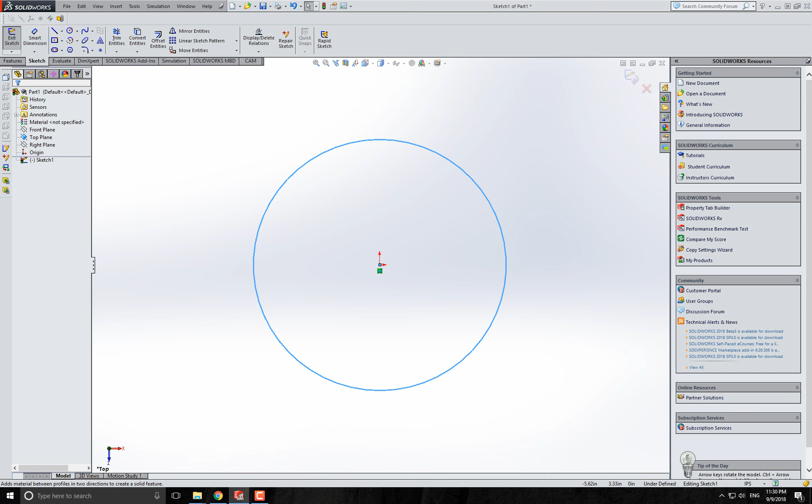First, we need to create a profile and start with a sketch on the top plane. We're going to create a circle for the faceplate, with a diameter of 5 inches, so the radius will be 2.5. We sketch this, and it's good. Then we extrude 2.5 inches thickness, and now we have this raw material of the clock plate.

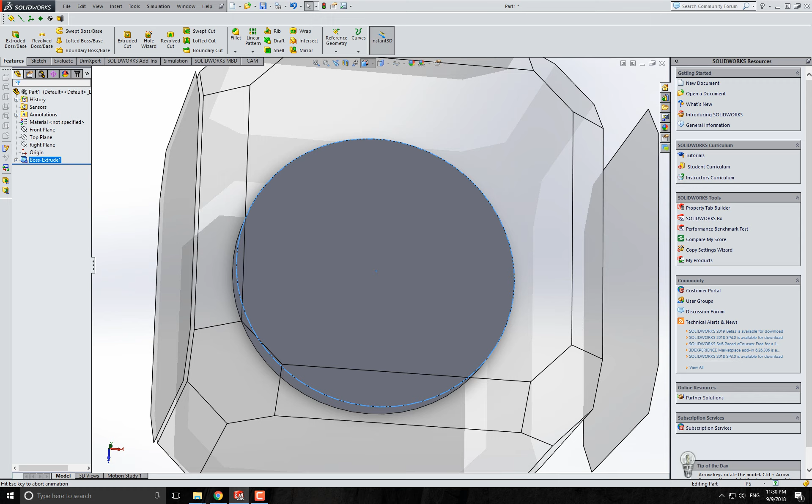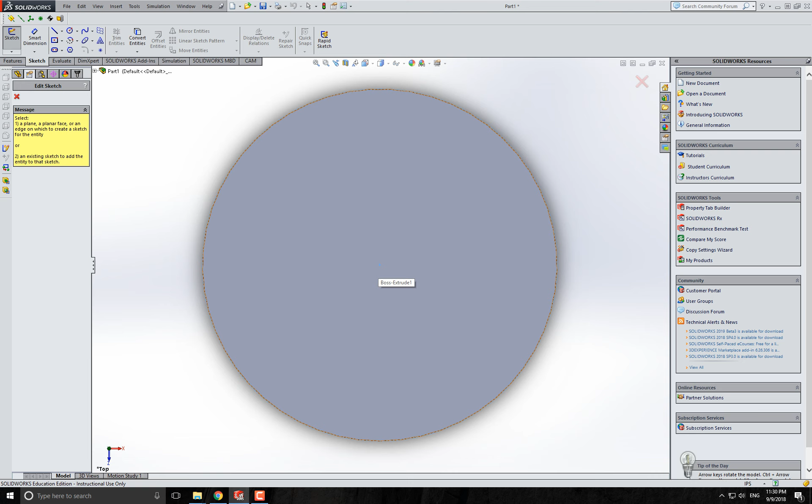We go to top view, and we're going to find the three holes, 3 little holes. I'm going to sketch, and use some lines to help us. It asks us which plane we want to draw on, so we're going to draw this sketch on this plane.

This line will help us find the top hole, which is 2.31 inches from the center. Let's specify this 2.31 inches. Then the next one is 2 inches, and same here, 2 inches.

You can tell the 3 holes should be at the same location with the clock length we just drawn. The dimension and length here is 1.16, and same over here is - let's delete this - 1.16.

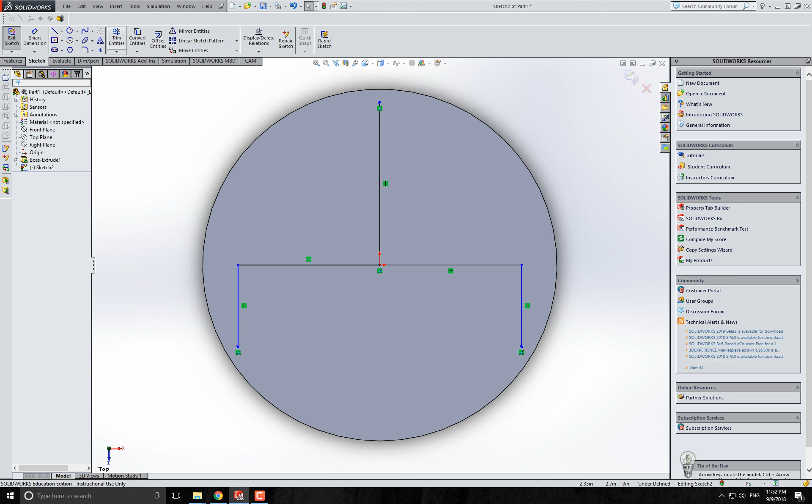Now we've located the 3 points or locations of the tapped holes. What we're going to do is delete all these lines, but keep a point here. So we come to this point and sketch a point - we put a point here, here, and here, because we don't need the lines anymore. I'm going to trim this line and all the lines here, leaving only the 3 points.

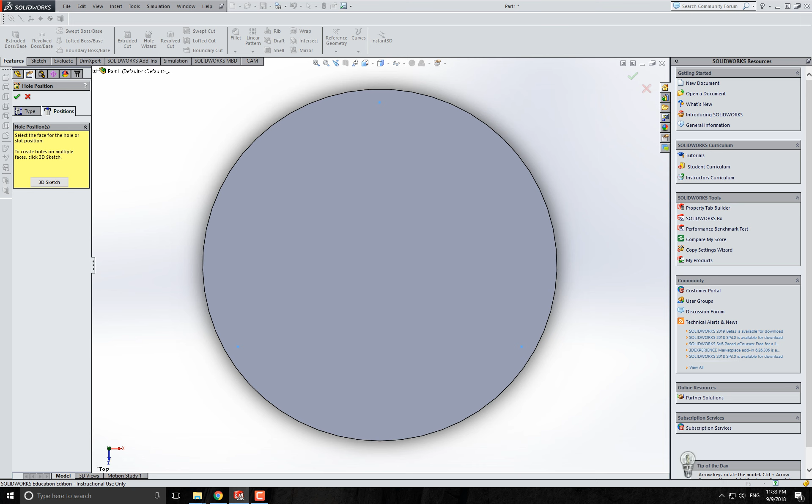The next step is to start a new sketch and add the hole wizard. Click the hole wizard and choose the same type of hole, 6-32 and straight tap. Now find the locations - the surface will be here, and locations 1, 2, 3. Click OK, and you can see the 3 tapped holes.

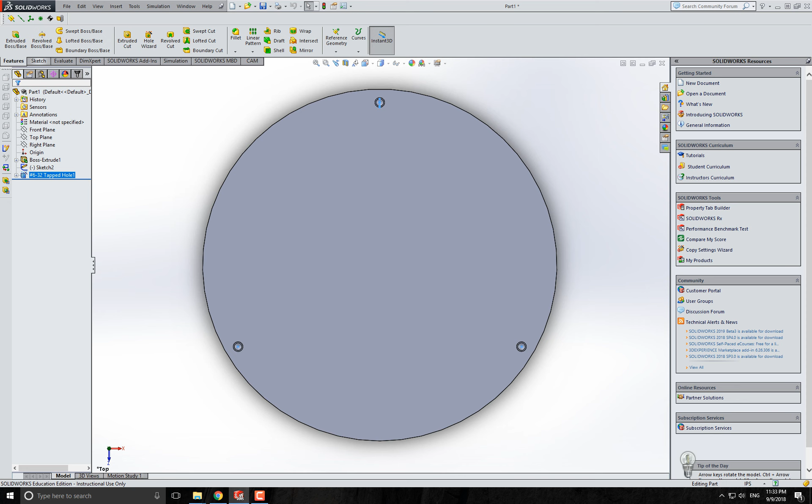Now let's go ahead and draw the numbers. Go to sketch, and I'm going to sketch on this plane. First we want to choose the center line here - it's not a solid line, but a center line. We're going to start from the center point and determine where we want to put the numbers.

Here we're going to use 1.5 length, and I'm going to create another center line, which doesn't really matter - maybe 1, let's choose 1.

We want the center of this line, because when we add a number, we want it to be centered here. So I'm going to choose this point and click Control and click on this line. You can see there's a 'make midpoint' option, so we click make midpoint. You can see it's attached.

We can keep drawing, move it up and down, and drag it long and short. We'll keep it as 1.5 here - maybe this is too long, so let's make it point 6.

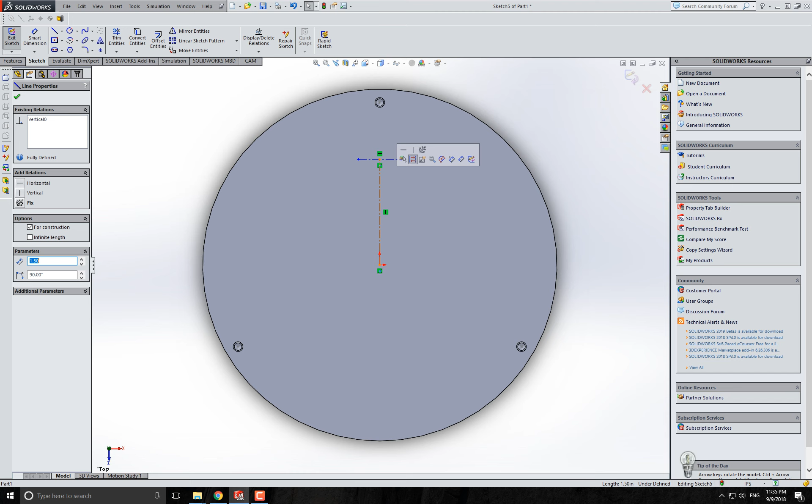It looks good. Next we will create 12 of these center lines because we need 12 locations in this circle for our numbers. How do we do that? We first choose the 2 center lines we just drew and go to sketch pattern and click here. You can see the circular sketch pattern, and we specify 12 patterns and click OK. Now we've created 12 lines.

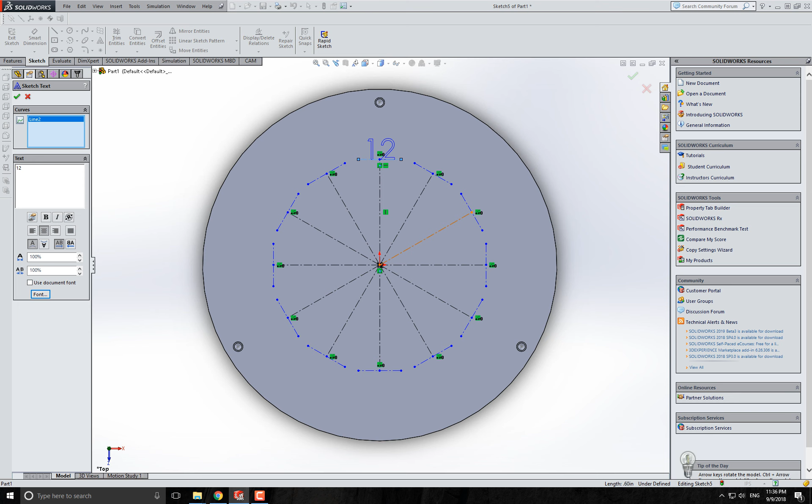Next we need to add numbers, starting with this first one. We choose this line and add 12, centered. Now we need to specify the font size - we want it in points, maybe around 28. Now 12 is here, click OK. We've added our first number, and I'm going to go ahead and add more numbers.

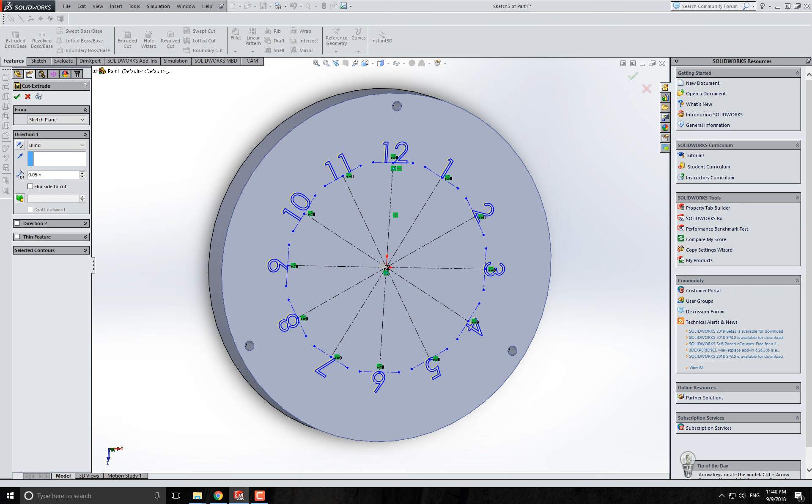Next we need to cut a little bit of depth for these numbers. To do this, we go to Features and choose Extruded Cut, and set the depth to 0.05. Now we click OK, and we should get these steps of cut.

Now we have our clock plate. Remember to save your file.